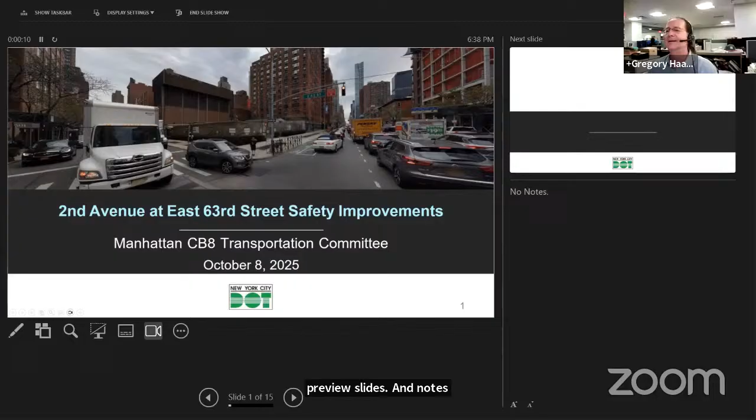Okay, can you see the slideshow? Yes, the whole thing. We do, but we see the preview slides and notes also. All right, I don't want to do that - hold on, actually there are no notes. There you go, there you go. Yep - actually no, that's not it, that's not it. Let me try something else here, hold on.

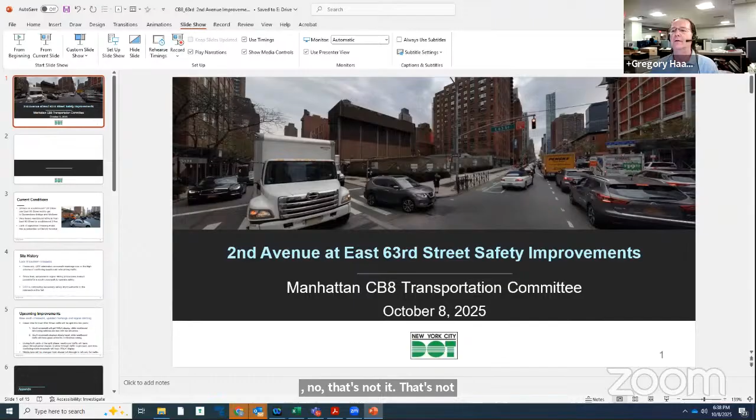Okay, what do you see now? Still don't see it. You see what? We're only seeing you, Greg. We don't see anything. Did we hit share screen?

Okay, now we see your screen. I think you need to open the file, we see your folder. Hold on, then this should work. Now what do you see? We see the right thing now.

Okay, good, we're good. So this is about Second Avenue and East 63rd Street. This photo here is looking south on Second Avenue. This is looking east on 63rd Street. And there's no crosswalk here, I'll explain why in a minute.

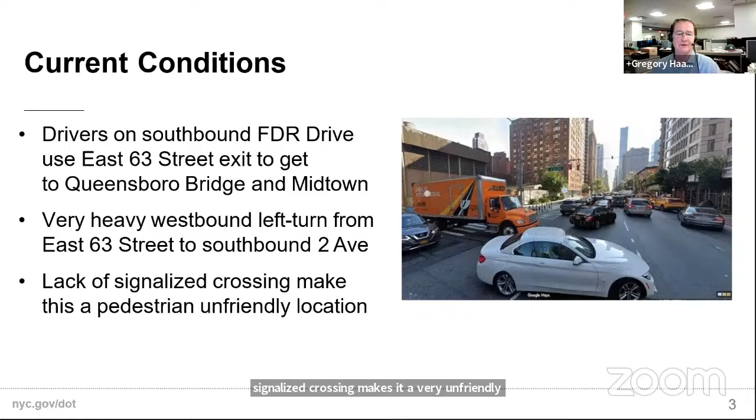There used to be a crosswalk there about 20 years ago, and it was eliminated because of this dangerous, conflicting, large amount of traffic that turns left into the crosswalk. So that's why we took it away 20 years ago. Since then, we have different signal timing tricks that can make it possible for a south crosswalk to operate safely.

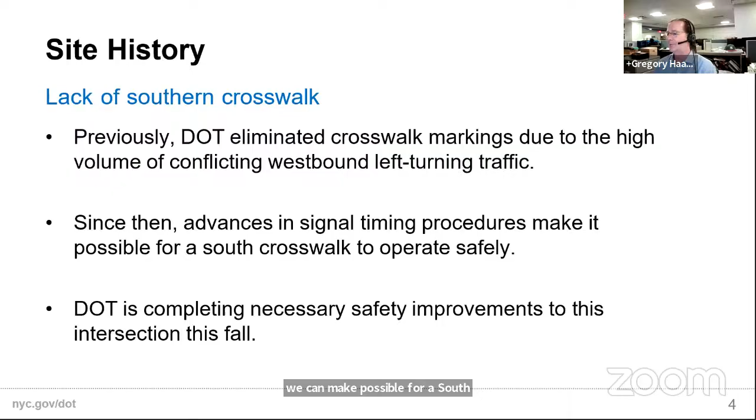So this is the idea: the green time for westbound East 63rd Street is split into two parts. During the first part, the south crosswalk will get the walk display with the stickman, and the westbound left-turning vehicles will be held with a red left arrow so that the pedestrians can walk without having to worry about cars turning into them.

Then, during the second part of this split phase, as we call it, the south crosswalk stickman will turn into a steady hand after the pedestrians are done crossing, and the red arrow will turn into a green arrow so the cars can turn without dodging pedestrians. During both parts of this split phase, there would be a green through arrow for 63rd Street because the through traffic doesn't run into anything, and the north crosswalk will have the walk display during both parts.

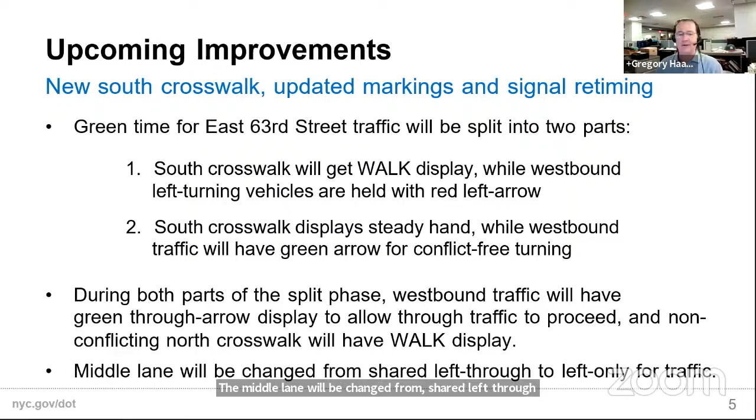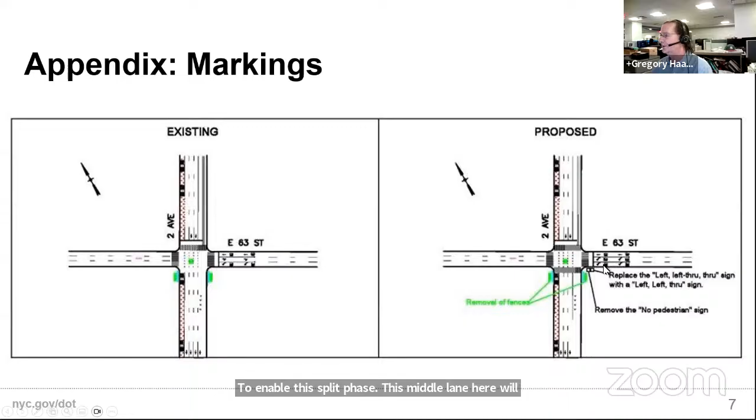The middle lane will be changed from shared left-through to left only. Let me show this - it's kind of small. Today on East 63rd Street approaching 2nd Avenue, the markings are faded, but the signs tell you the left lane is left turn only, the middle lane is for left and through traffic, and the right lane is for through traffic. To enable this split phase, this middle lane will also be left only, so there'll be 2 left-only lanes and 1 through-only lane.

Just to once again emphasize how the timing will work - this is the way it is today. When it's green for southbound 2nd Avenue, these green circles represent the crosswalks, so the west and east crosswalks go, the north crosswalk is don't-walk, and there is no south crosswalk, while 63rd Street traffic is held with a red. Then it just flips: green for 63rd Street, green walk for this crosswalk, and red for that traffic.

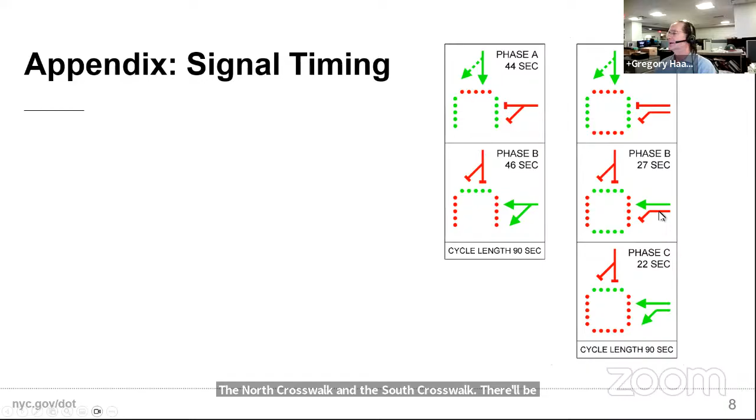Under the new plan, this phase will stay the same. Here are the 2 parts of the split phase I was just talking about. During the first part, it's green, it's walk for both the north crosswalk and the south crosswalk. There'll be a green through arrow for through traffic and a red left arrow so these pedestrians crossing don't have to dodge cars that are turning.

Then, 27 seconds later, this will turn into a don't-walk with the steady hand. The green through arrow will stay green, and this red turning arrow will turn into a green turning arrow, so that when they turn, this will be don't-walk.

That's the plan. Any questions?

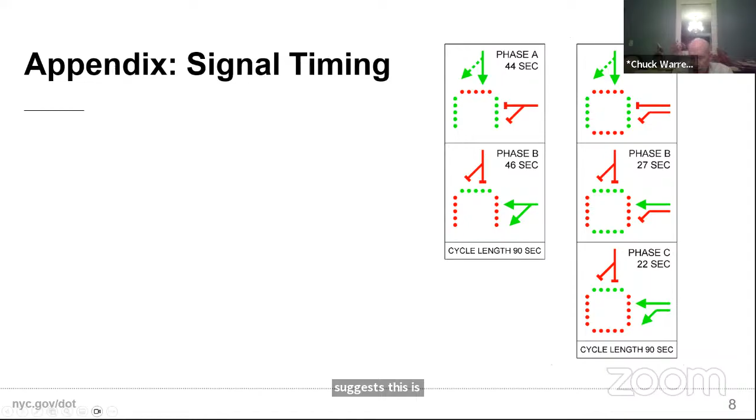Before we get to questions, one thing that comes to mind: I know at various other intersections with lights like this, a lot of times pedestrians just keep crossing. This suggests it's going to be a problem for traffic wanting to make the left turn coming off the bridge, and you're going to get a lot of backups.

That's true, we do see that, but there isn't a whole lot of pedestrians. There are going to be jaywalkers here, just like there always is. But if there's a traffic control agent, which often there is, especially during PM rush hour, as long as it's don't walk, his job will be pretty easy, holding the jaywalkers. It's very difficult for a cop to hold pedestrians when it says walk.

What's one lousy cop going to do? But if it says don't walk and there's a cop out there, remember the great majority will have already crossed, because during this phase, when it's green for 2nd Avenue, the pedestrians are piling up, and the ones who piled up will have already crossed. I can't tell you nobody's going to jaywalk during this phase, but at least the ones who were waiting will have already crossed. Anyone who arrives with no cop there, yes, there could be jaywalkers. But during the crunch times, when there usually is a traffic enforcement agent, at least he can hold them because the steady hand will be up.

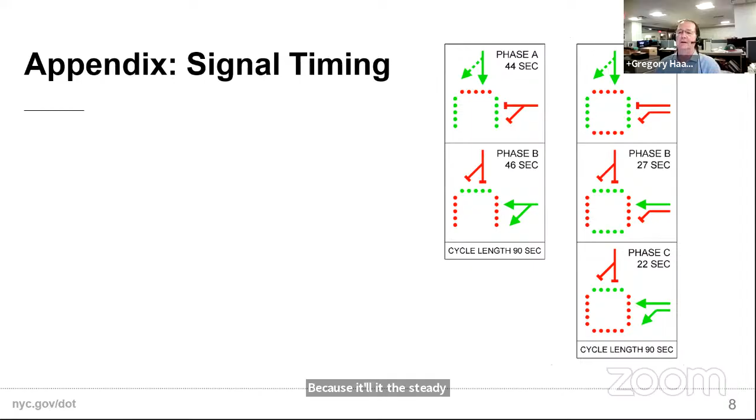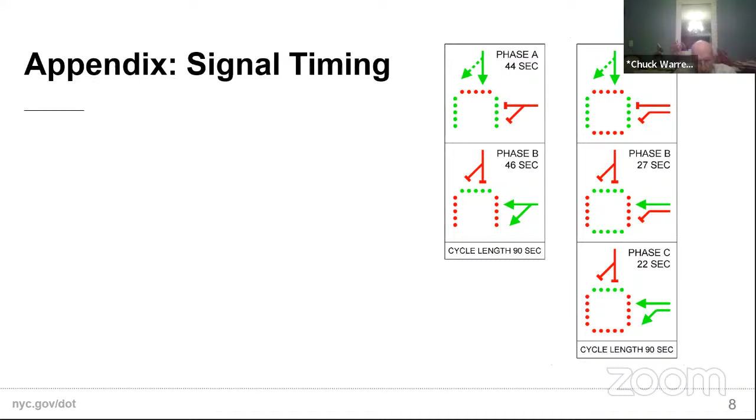So, are there any questions from the public on this new configuration here? Is there any hand raised at all, John? First, Dylan Yen. Hi, can everybody hear me?

Yes, cool. So, as somebody who uses this span almost daily, the upper level already experiences severe backups reaching deep into Queens, especially because it's the only toll-free route in Manhattan that doesn't hit the congestion zone. If I understand this correctly, DOT is proposing to cut turning time in more than half and reduce that large amount of traffic turning onto 2nd Avenue.

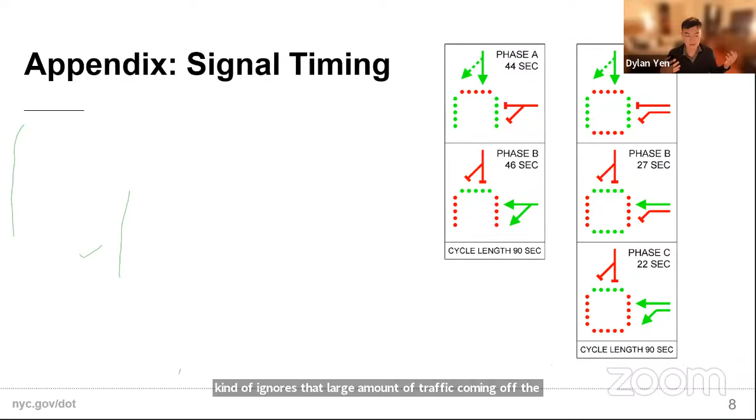It also leaves turning into like 2 lanes only, a left turn only, turning it into a single lane for through traffic to squeeze through at a standstill. And if somebody does a pickup or drop off anywhere on 63rd Street, nobody's moving for basically 67 seconds. The idea that this will create a conflict-free crossing while introducing a pedestrian conflict zone kind of ignores that large amount of traffic coming off the 59th Street Bridge. I just don't understand why this is happening.

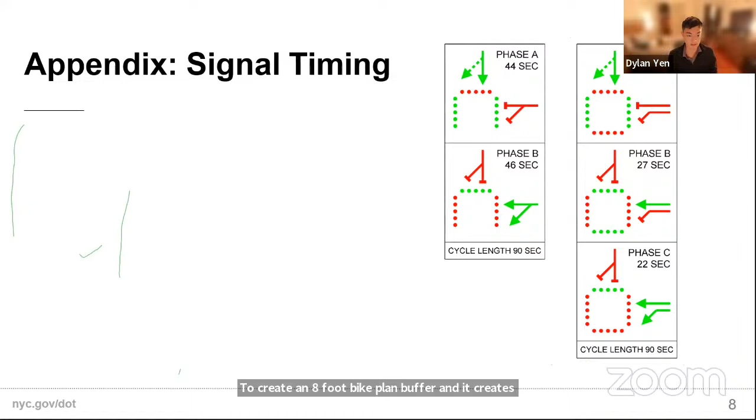I also want to remind everybody that DOT's redesign of 62nd Street has already reduced 2 moving lanes to 1 coming off that bridge to create an 8-foot bike lane buffer. It creates large backups all the way down to Queens, causing unnecessary gridlock and pollution on that upper level. This proposed change will just exacerbate that problem.

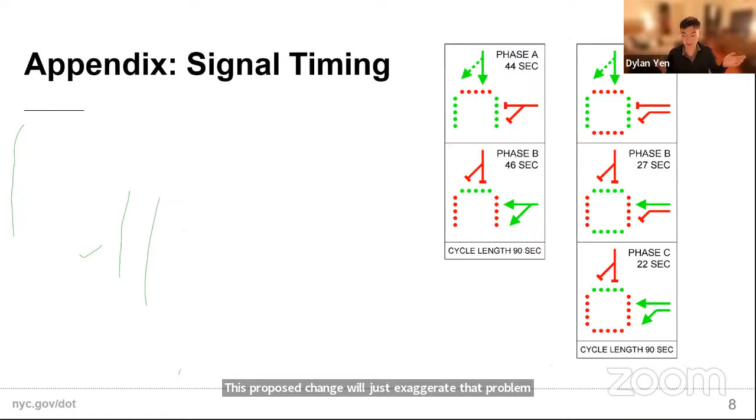And as DOT presented, they're not going to be able to stop the jaywalkers unless there's a cop standing there, so we're just creating unnecessary pedestrian conflicts. That south crosswalk was removed for safety reasons after a walkthrough with the DOT commissioner about 17 years ago, when protective railings were installed to reduce potential pedestrian conflicts and jaywalking. That worked. If it ain't broke, don't fix it, right?

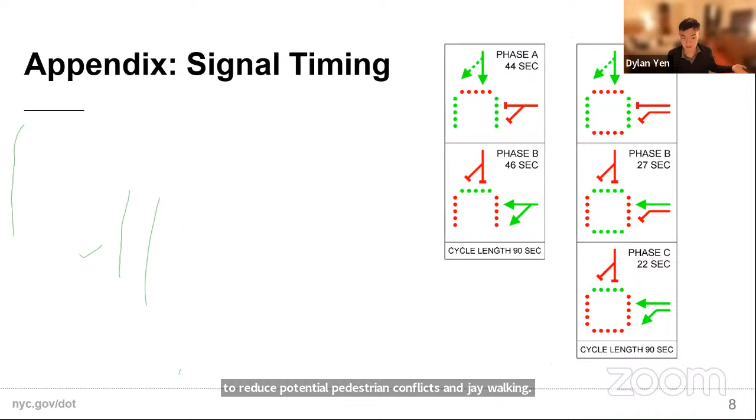We try not to hem in the pedestrians for the benefit of the cars. Okay, but let's, I think we've heard enough. There's another person who wants to speak on this, Marjorie Russell.

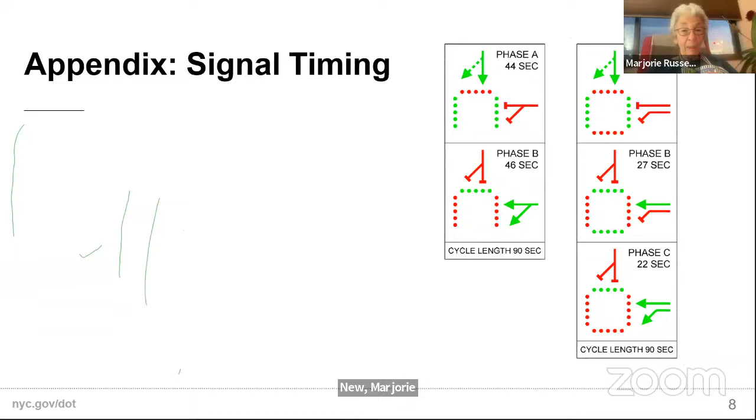Mute Marjorie. Okay, I want to agree with Dylan's comments. I live on 63rd and York. I try to avoid crossing 2nd Avenue anywhere downstream of the direction of traffic because they're all crazy, and it is so crowded. I want to give congestion pricing all the help it can get so that our neighborhood is bearable again. And I think 2 left turn lanes would be great.

And maybe more signs or something for these crazy pedestrians. I myself wouldn't cross there even if there was a walk sign, because cars ignore it. They turn right in front of you and right in back of you.

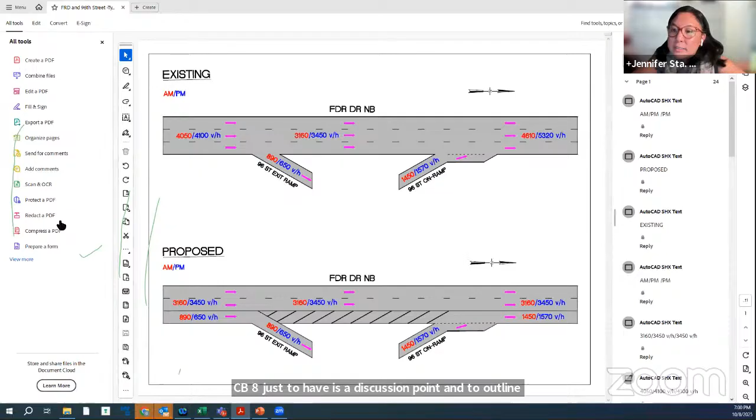Okay, so this is just a diagram, not to scale. So you're going north on the FDR Drive. There's an exit here for 96th Street, and then here's the entrance. The entrance does not have much of an acceleration lane at all. It's very dangerous for vehicles to try to weave in here. So the solution is to make this exit only so that it can come into its own lane.

It's exactly the same way it is at Houston Street. At Houston Street on the northbound FDR, the right lane is exit only so that the entrance from Houston Street comes into its own lane.

Okay, that seems like an improvement. Any comments from the public on this? Or the board? We hear anything?

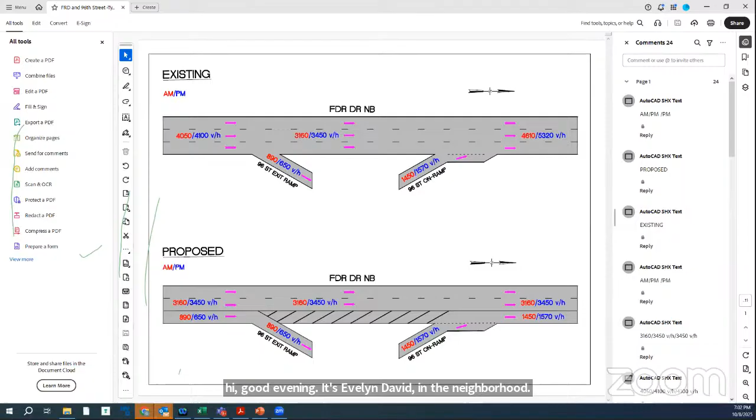It's Evelyn David in the neighborhood. I often drive along 96th eastbound, get on the FDR, no problems.

So what are you doing? You're making that an exit only from the FDR? I don't understand, I don't know what you're doing. Right now, if you're going north on the FDR, you can get off at 96th Street and go across 96 to the west side. Okay, so yeah, go ahead.

Can you see this aerial? I can't, I'm on the phone. No, just explain to me. Okay, have you gotten rid of the exit for getting northbound on the FDR? And if you've done that, where are you going to put the cars? How do we get on northbound 96?

We are not eliminating any exits or any entrances. The exit, when you're going north on the FDR drive, there's an exit for 96th Street. Correct, and there's 3 lanes on the FDR and there's an exit. We are going to make the rightmost lane exit only, so that after the exit there's only 2 lanes on the main line, so that the entrance to the FDR can come into its own lane and back to 3 lanes. Yeah, it's a tough entrance.

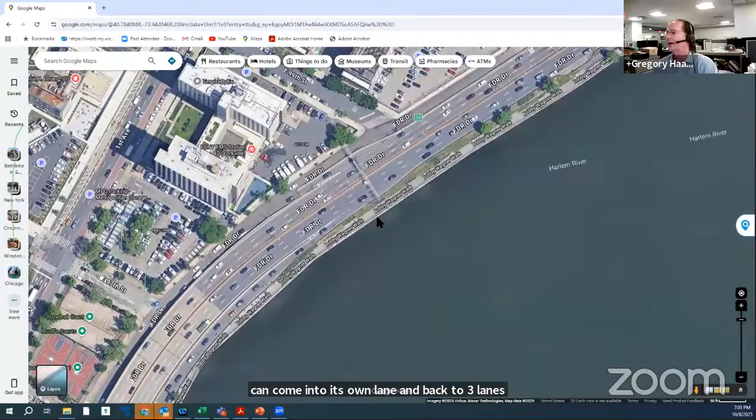For those of you that can see this aerial, look at that entrance. This does not comply, doesn't even come close to complying with federal regulations. There's not enough room to merge, plus there's a curve here. So when you get on the FDR from 96th Street, that's what's pretty scary. You put your foot to the floor and just pray that there's nothing.

No, actually, oh okay, all right, so there is a dotted line there. We all wait, we wait for the traffic to go ahead, and then we merge into the traffic going north. I'm speaking, yes, but getting when you're off the- yeah go ahead, go ahead. Sorry, when you mean you wait to get on the FDR from the entrance from 96th Street, is that what you're saying?

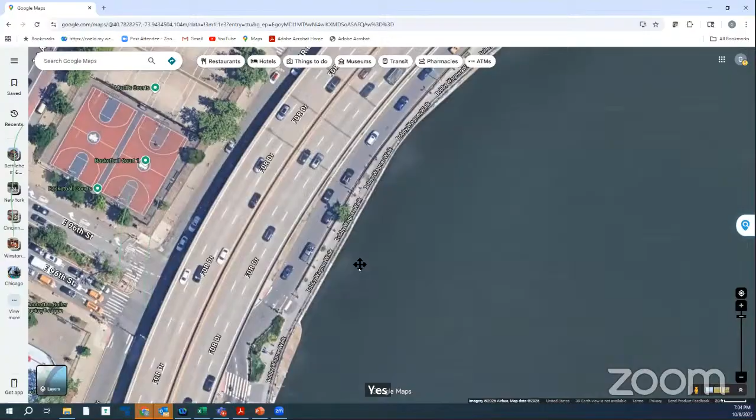Okay, no, okay, so if you're on 96th getting on the FDR drive going north, you go through a little drive-through, and then you get onto a part of the highway that's got dotted lines. You're not allowed to go over into the traffic until it's clear. So we wait, everybody waits. It's difficult to see if it's clear, there's not enough room. Oh, okay.

You have to come to almost a complete stop. Well, so that's it, it's hard. There's a lot of accidents here. It's very difficult to enter the main line from a dead stop, and plus the way the highway curves, it's hard to see even if that lane is clear.

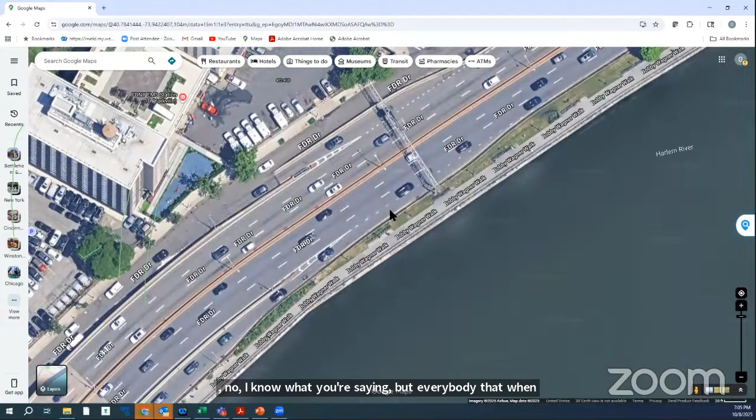Yeah, no, I know what you're saying, but everybody, whenever I'm driving, we're all really careful, we just pay attention, it's no big deal. But anyway, all right, so you are making that- it has a high crash rate, a very high crash rate. So what you're doing is making that into an actual lane.

Correct. And then you're making- okay, it will come into its own lane, without the need to merge. Oh I see, okay, all right, okay I got it, good idea. Okay, thank you, this is a big improvement.

I don't own a car, but I occasionally rent a car, and that entrance on 96th Street, I've done that because I'm going into Westchester, and it's exactly what you said. I've never had an accident, but it comes around, the cars are coming at you very quickly, and you can't see them well because they come around a curve. This is a big improvement.

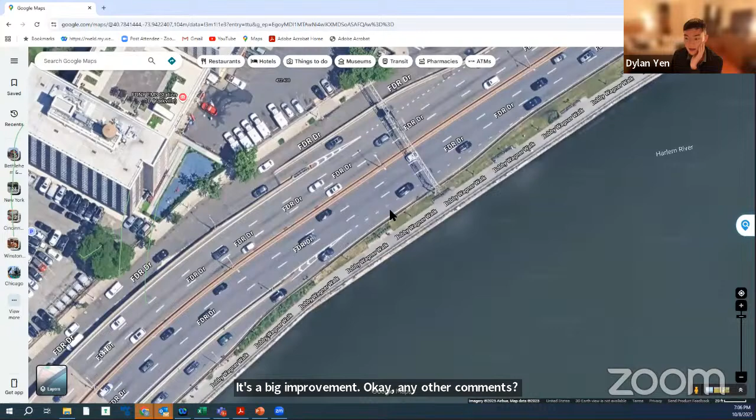Can you bring up that VPH graph that you have? That handy one, yeah, lovely, thank you. So just a couple of questions. When you're removing a lane, you're going to cut down on the VPH, the throughput on the main line, right? We're basically cutting off like we do at Houston Street and at, I think, 61st, right? Where it comes, where it goes into 2 lanes.

We're cutting the throughput rate, right? Basically through to the Triborough and the Willis. This is how I'm understanding it, correct? Yes, instead of in between the exit and the entrance, there will only be 2 lanes instead of 3. Okay, so we're cutting down a through lane.

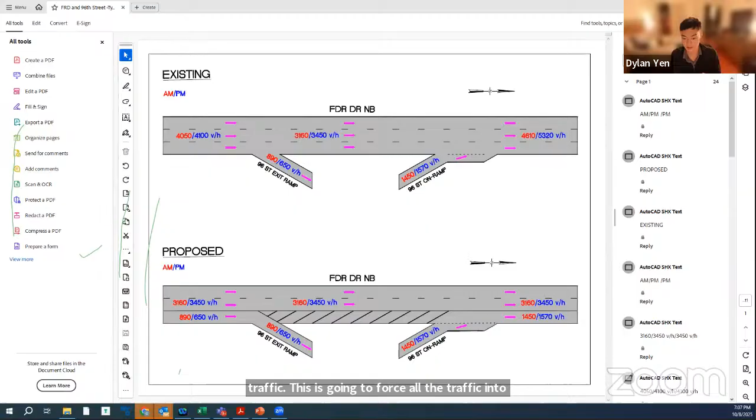Yes. I understand it's a high crash zone, but my worry is whenever I come up from the Brooklyn Bridge onto the FDR, there's always a backup, sometimes all the way down to the Manhattan Bridge, where the 3 lanes merge into 2. My worry is it's just going to force all the northbound through traffic to the bridges into 2 lanes. And I understand it's a really short on ramp. It's almost as bad as the Merritt, not quite, but almost as bad as the Merritt up north.

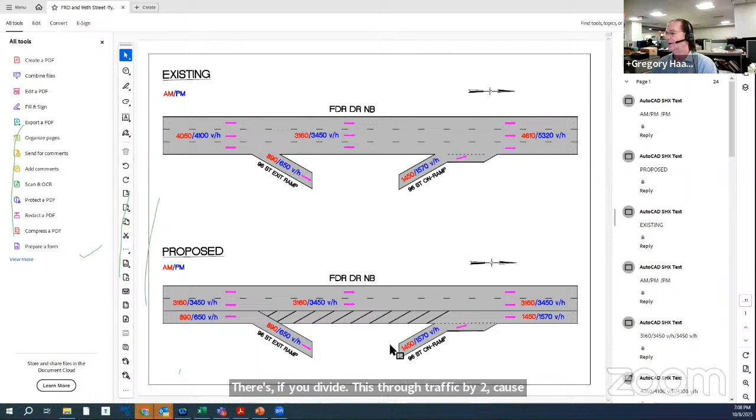But is there a way? Well, first of all, does the traffic support removing a lane from the main line? Yes, it does. If you look at these volumes here, this is the max there is. This would be roughly 1,700 a lane. But look at this, if you divide this through traffic by 2, because there's 2 lanes, that's about what comes on.

And just to show you something else, this is the 96th Street exit. Look at all the cars getting on the 96th Street, and look at how clear this is. There are times when this does back up, but 2 lanes should suffice for the amount of traffic after this exit. During crunch times like this, anyone who's going through would never get in the right lane because it's backed up due to the exit.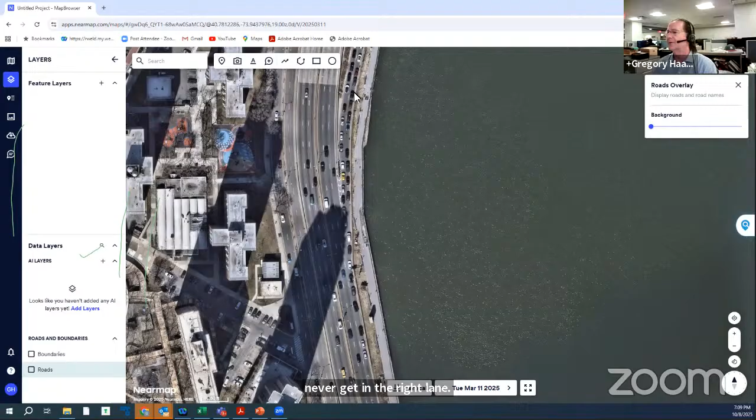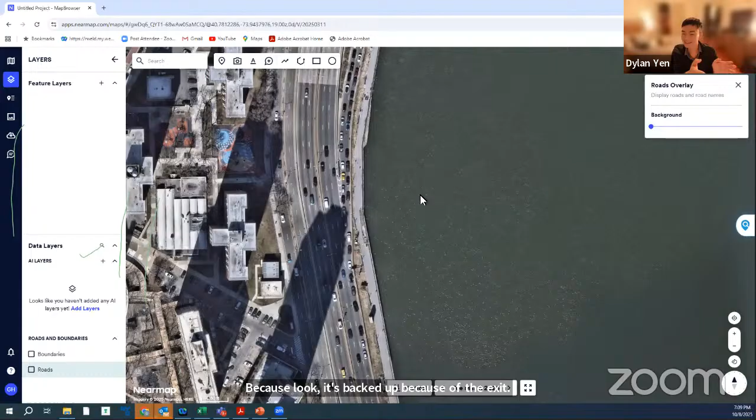And how do we make sure that people don't fly down the right like they do at Houston Street? If you're going to close the lane just with paint, I guess is my question. We can't keep people from flying down, but at least they'll be flying down into their own lane and not merging into another lane. We can't keep people from speeding or driving recklessly, but at least they'll be coming into their own lane and not forcing themselves into somebody else's lane.

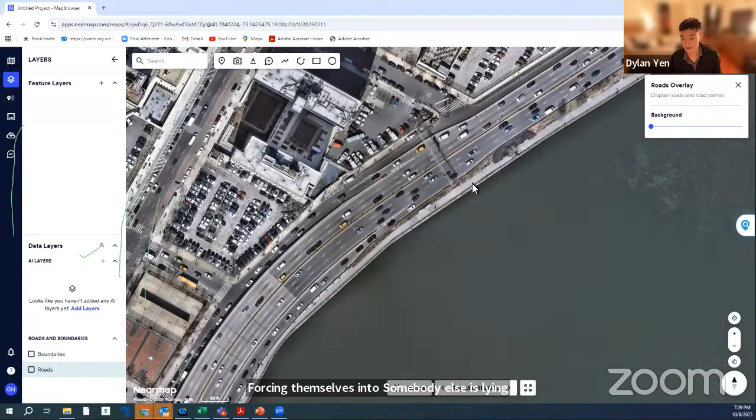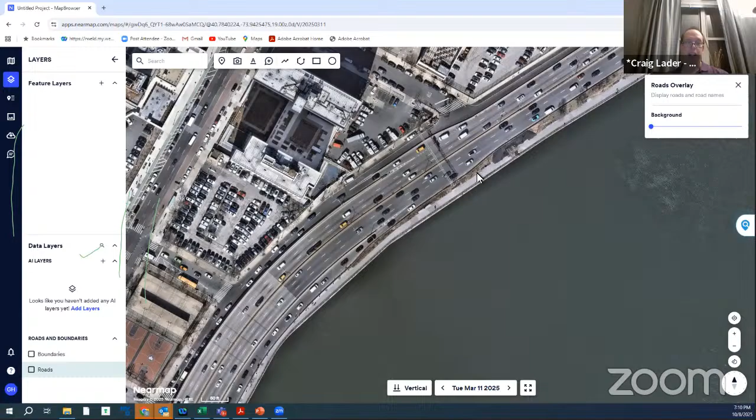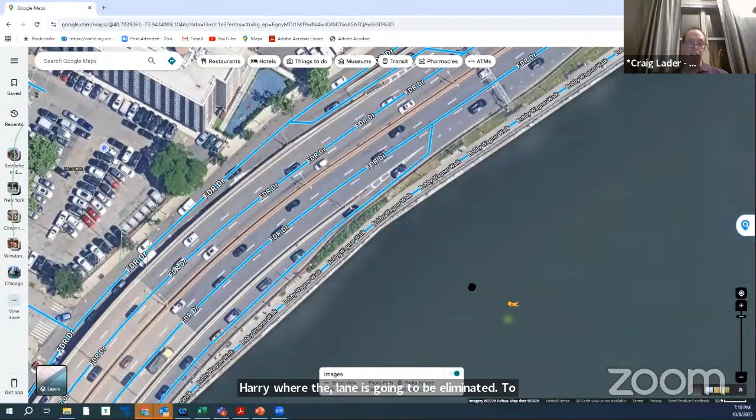Yeah, okay, all right. Before we go to Andrew, I just want to follow up on that because when we learned about this proposal and I had previewed it, I sent in a comment saying we should include a Jersey barrier somewhere along the way in that area where the lane is going to be eliminated, to essentially ensure that anyone who tries to drive on the new shoulder will not be able to do so the entire way, and will have to make sure they are in what is now the middle lane, to ensure the inbound entering vehicles have a clear, uninterrupted, safe entrance.

So is there any reason - you're talking about this here, this will be striped out. You're saying maybe we should put something hard here to prevent the cheaters from using this lane. Yes, because we'll look into whether that would make it safer for the inbound traffic, incoming traffic, I would assume. We'll look into putting delineators or some sort of vertical element. Any type of delineator would be great. So if you could look into that, that would be really appreciated.

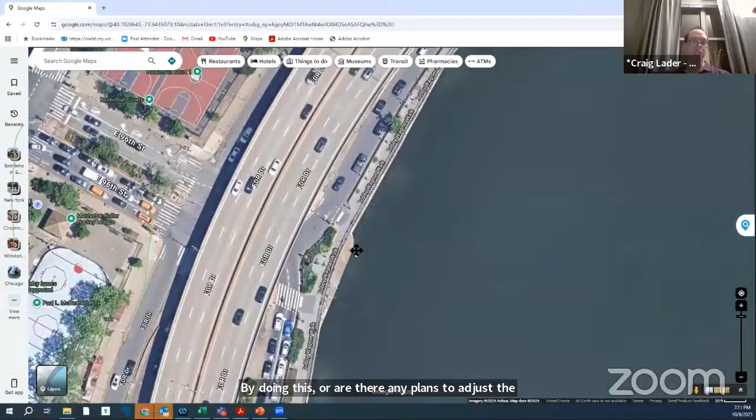Just one more question, actually. Especially since congestion pricing began, there's been a lot more congestion at the entrance filtering back onto First Avenue, with vehicles trying to make the right turn from First Avenue to enter the FDR Drive via 96th Street. Oftentimes traffic backs up coming up the York Avenue entrance, largely because you have 2 lanes coming in that have to merge into 1 lane on the existing ramp. By doing this, are there any plans to adjust the configuration so you're hopefully allowing for improved conditions as a result?

Because it's certainly going to improve the flow entering, but you're still going to have the secondary issue of 2 lanes from both directions filtering into 1 along the ramp, which I guess you can't avoid. But can you do anything to improve that condition, straighten it out a little, and make that merge a little clearer, whether with striping or something else? Great question, Craig.

For this right now, no, but we have on the books, I'm sure you guys know about the York Avenue study, and I'm hoping, because York Avenue is just a nightmare northbound, when we do the York Avenue study we will look at improvements like around here to see what can be done. So to answer your question, for this project, no, we haven't done anything here, but we will look at it when we commence the York Avenue project. We realize there could be a lot of things we could do right in here.

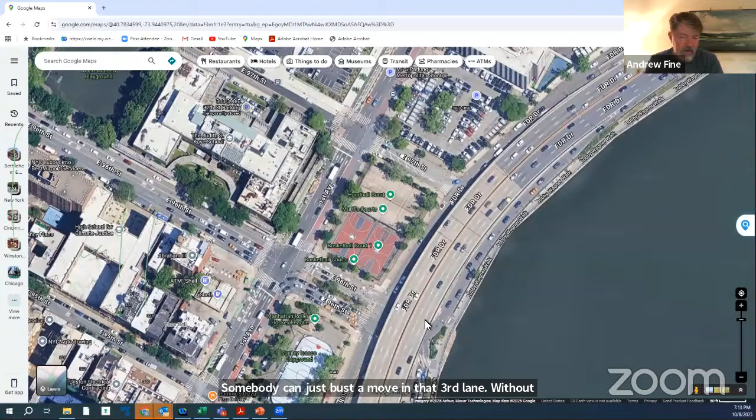Can't see anything, but if you can hear me, Craig makes a great point in terms of the lane that could be cheated on, that third lane that you're proposing blocking off, because you would not really accomplish anything if somebody can just bust a move in that third lane without any Jersey barrier or anything else. You're just going to end up with the same accident rate, maybe even worse, because you're providing a prohibited space that people can just cheat and blast through.

That's one point. Second point, to Evelyn's point, I've merged on from 96th Street probably a few thousand times in my entire life. It's not an issue. If you don't have the ability to merge on, you don't merge on, you wait. That's just the way it works. That's called driving. So if you don't know how to drive, you probably shouldn't drive. And I don't really see this as solving a problem that I don't think really exists.

Third, what you guys should really be looking at is the light timing on First Avenue and 96th Street, because as somebody who has given up on trying to make the right turn on 96 from First Avenue when it is legal, it's impossible. The lights are timed such that all the traffic from 96th Street creates gridlock, so when you finally get the light on the First Avenue side, you're lucky if 4 or 5 cars manage to squeak in, either through the right turn lane, the second lane, or even the third lane of traffic on First Avenue. The light timing there is an absolute disaster, and you definitely need enforcement there.

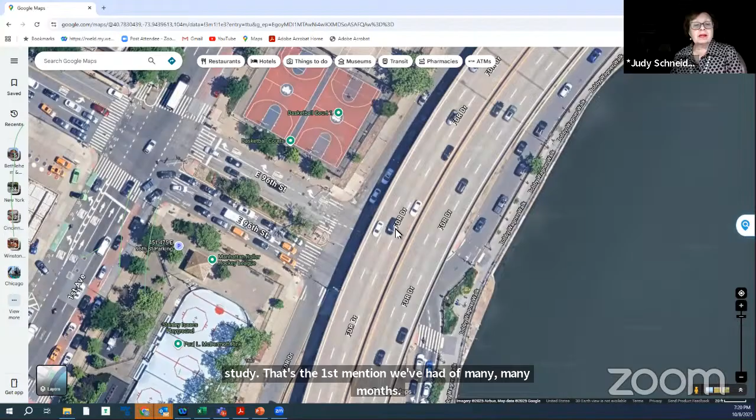Greg mentioned the York Avenue traffic study. That's the first mention we've had in many, many months. Can anybody tell us - I was on that committee - when that's going to resume? Is it in '26, '27? When are we going to start working on that again?

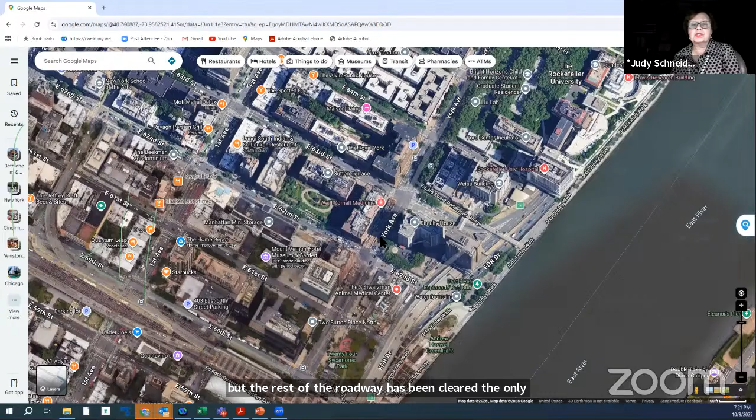It was requested to wait until the road work, the DEP work, is done, and that work should be finished by November. They have two water mains, two drains on 62nd Street that they have to put in, but the rest of the roadway has been cleared. The only blockage is that between 66th and 67th, MSK is building a new hospital. Other than that one block, we can go around it, and hopefully start to plan the York Avenue traffic study sometime after the first of the new year.

Greg, thank you. We're also enthusiastic to officially kick off, or re-kick off, this study, because it certainly is ripe for improvement. So we will keep the board posted when we're able to fully move forward here.

I spoke with the people doing the York Avenue work, and they tell me by the end of this year they should be done. They've done most of the sidewalks, they've done the street. The only thing left is the hospital, and I don't think the hospital should hold us up from 66th to 67th. That's what we're hearing as well in terms of timeline, so we'll certainly keep the board posted. It would be nice to have a 20th anniversary start of this.

We heard the same thing, that they should be done by November, so we're excited to get started. But when pressed, they wouldn't guarantee they'd be done by November.

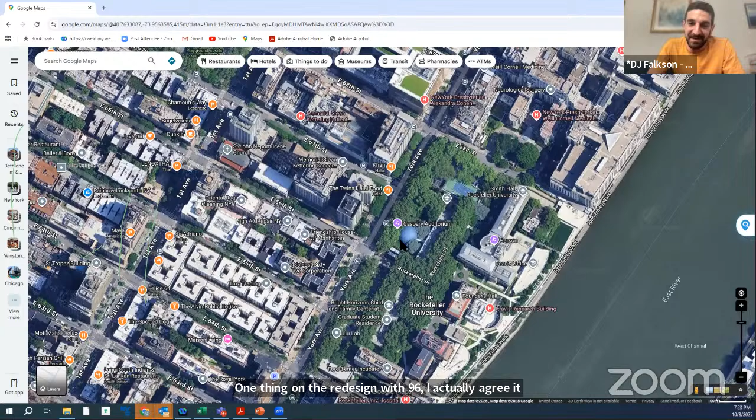So it's great that some people are good drivers and would never crash there, but I think the job of DOT is to deal with drivers as they are, not as we wish them to be. One thing on the redesign with 96th, I actually agree it seems bad for drivers there. I won't opine on how to do that best, but I'll mention it's a heavy pedestrian crossing with the underpass there, because if you're walking up or down the Riverwalk, one way to cross back over to First Avenue is there. It's already not a great experience for pedestrians, so please don't deprecate it further with any street redesign efforts.

A more general comment and question, Greg. I think the tenor of comments we've heard so far on the first two items can basically be summed up as driver's needs versus pedestrian and safety needs. How does DOT balance the needs of drivers versus pedestrians and safety when making these decisions? I don't think you need to give a dissertation right now, but maybe publicizing that information more might make some of these meetings easier.

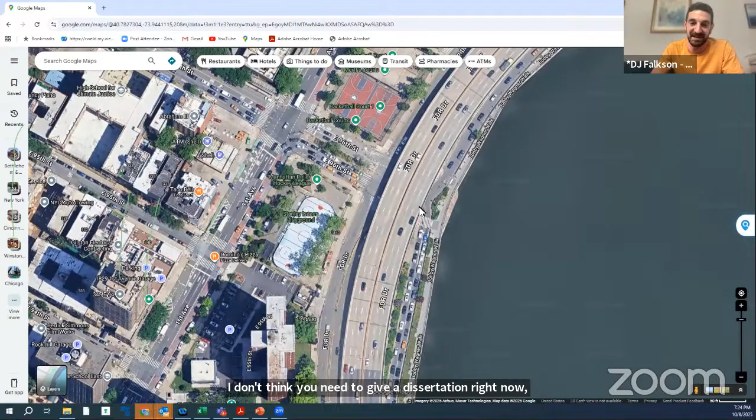Okay, thanks, DJ. I think we have one more person. I don't know if they wanted to comment on this item, Marjorie.

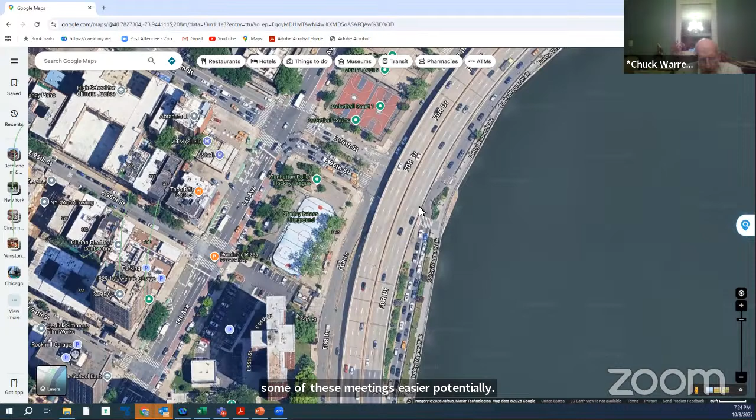Well, yeah, I just wanted to say about York Avenue and 62nd, 63rd - they're not actually done, because over the weekend they were digging up one of the middle lanes between 62nd and 63rd. They told me they'd be done by November, but there are no guarantees. They're always finding unexpected problems underneath there. But eventually they're getting there. That's all I wanted to say.

And DJ Falkson, very good remark - pedestrian versus driver, that is really a key thought. Thank you. Okay, let's go on to the next item.

This is a DOT item regarding the Lexington Avenue bus lane modifications on Lexington Avenue from East 60th to East 52nd Street.

No, so Chuck, I'll be introducing - and thank you, Greg, for your time and efforts tonight. I'll be introducing Nolan Levenson for our transit development unit and our TPM division. DOT is proposing to convert existing curbside bus lanes on Lexington Avenue from 60th Street down to 52nd Street. We've presented to community boards 5 and 6, and so we're here tonight to present to you all. This is a proposal where we're looking for board support, and as with the last two agenda items, we're happy to respond to any questions and address any issues after the presentation.

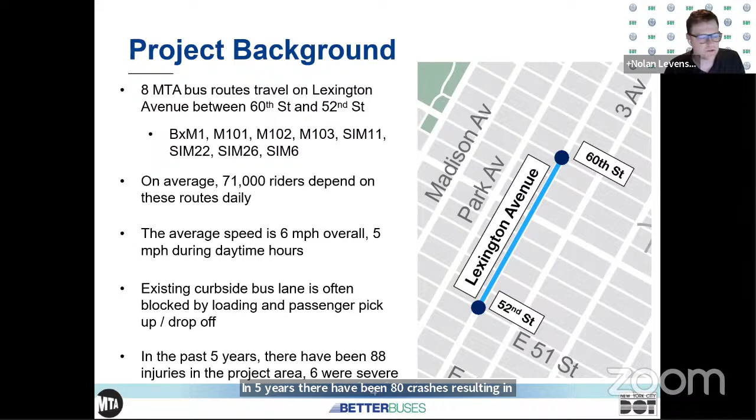It's also a location where we've seen a lot of injuries. In 5 years, there have been 88 crashes resulting in injuries, of which 6 were severe. Since this segment is in the congestion pricing zone, we've looked at the data, and traffic on Lexington has been reduced somewhere around 20% in the AM and PM peak hours. So we expect that this proposal can be accommodated within the existing traffic volumes on Lexington.

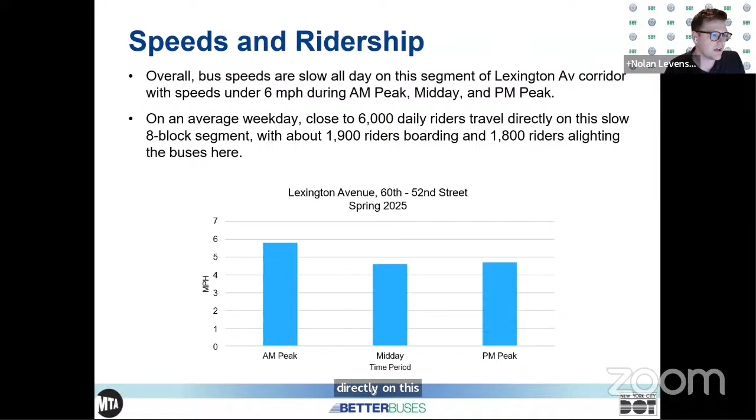Overall, bus speeds are slow all day on this segment of Lexington, with speeds under 6 miles an hour during the AM, midday, and PM peak. On an average weekday, close to 6,000 daily riders are directly on this corridor. Before we presented a number of all the routes combined, this is the actual amount of people on buses in this segment.

So the goal of the project is to improve bus service by upgrading the existing curbside bus lane to an offset bus lane that would be in effect 24 hours, 7 days a week. This would bring the benefits of the existing offset bus lane segment that we installed a few years ago between 96th Street and 60th Street.

We have seen great success on that segment, which we've presented to the board as a follow-up, where bus speeds have increased in that section of Lexington up to 26%, as well as a great reduction in pedestrian injuries by 35%.

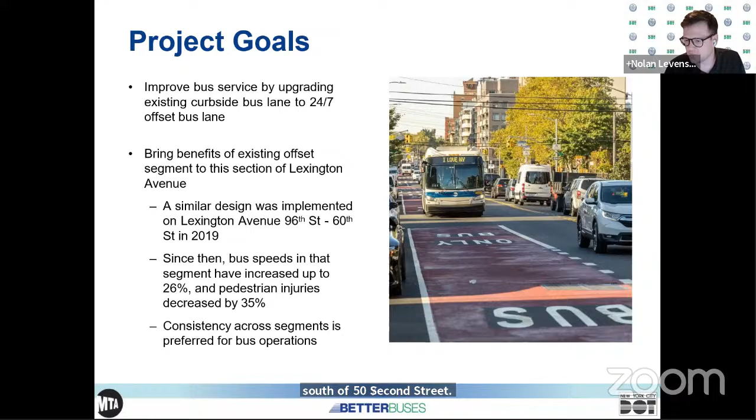The other thing is that we are looking for consistency of the bus lane treatment throughout the corridor. It is in the offset position between 96th Street and 60th Street currently, and also in the offset position next to the painted pedestrian sidewalk extension south of 52nd Street. So this segment wasn't touched before, but it continues to be an issue for bus service.

So the proposal includes, as I mentioned, moving the existing curbside bus lane into the lane next to the parking lane. We call that an offset bus lane. This improves bus speed and reliability. It allows buses to travel through the corridor without being blocked by vehicles using that curb lane.

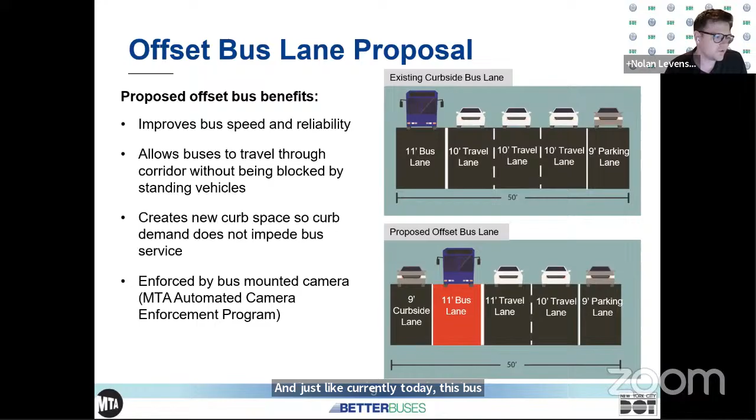It also opens up the curb, creating some of the activity that supports the uses on the west side of the street. And just like currently today, this bus lane will continue to be enforced by cameras on the MTA buses themselves.

This is what a typical block would look like in plan view. On the left, you can see the current configuration with 3 general travel lanes, a lane for parking on the east side of the street, as well as the bus lane on the west side of the street.

In the proposed configuration, there would be on the west side of the street the curbside parking and loading lane that I mentioned, two general travel lanes, the dedicated offset bus lane, as well as the other parking lane on the east side of the street.

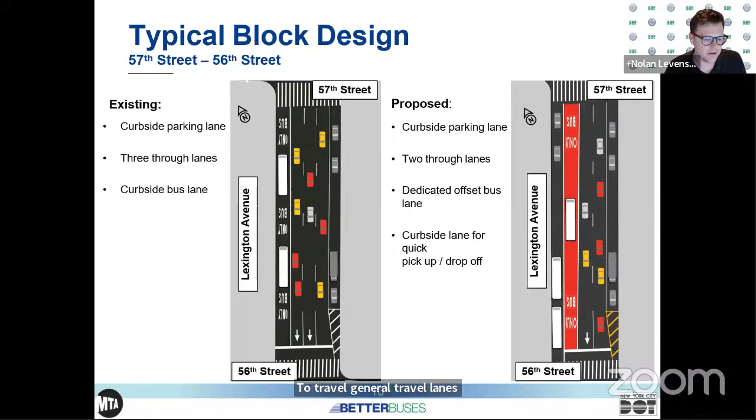So in summary, we are proposing to adjust the location of the bus lane from curbside to offset, which both improves bus service and curb access, as well as safety.

As Jennifer mentioned, we have presented to the other community boards as well as elected officials and other stakeholders, and we are generally looking to make this change either this fall or first thing in the spring next year. After the project is implemented, similar to the other section between 96th and 60th Street, we would be monitoring its performance as well as traffic.

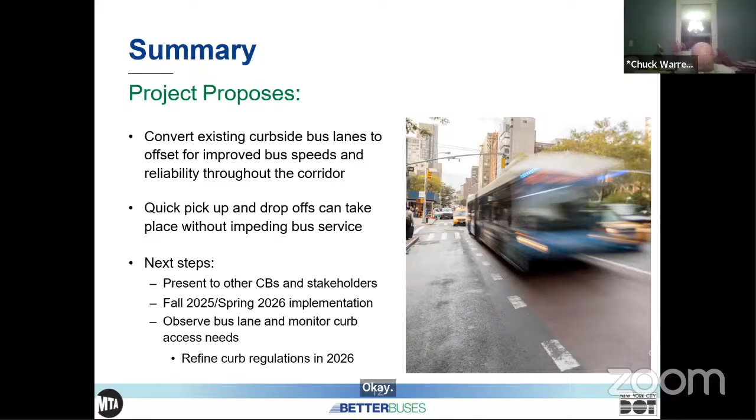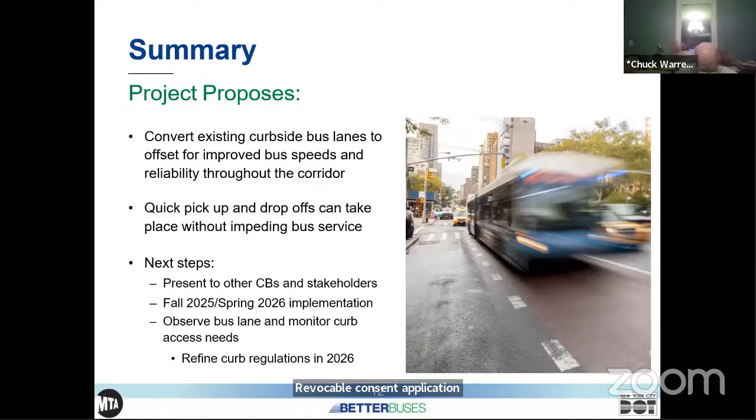Thank you, Raphael. Okay. Item number 4 is a revocable consent application to construct, maintain, and use a fenced-in area at 132 East 70th Street between Park and Lexington Avenues. Is there someone here to present that item on behalf of the applicant? Looks like Gary Eisner just raised his hand. Okay, or something like that. Okay. All right.

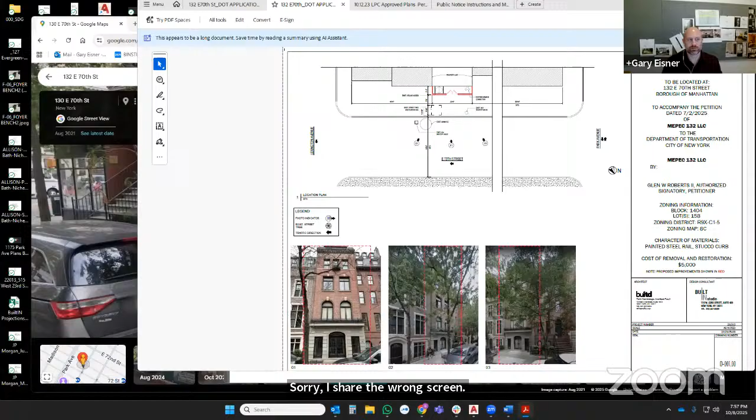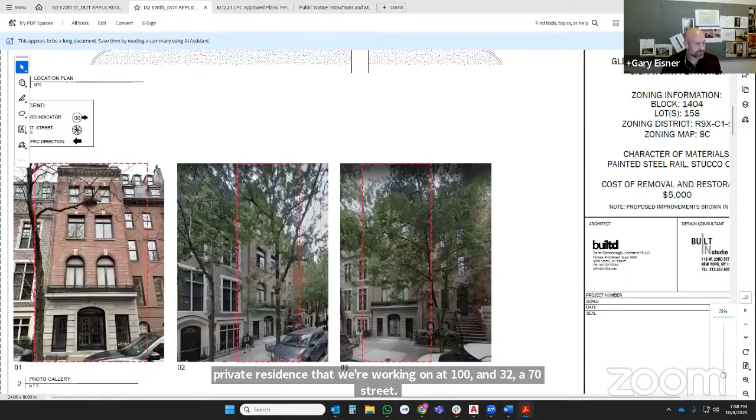Okay, so we're proposing installing a fence in front of this private residence that we're working on at 132 East 70th Street. I'll zoom in to our presentation so you can get a sense of the location of said fence.

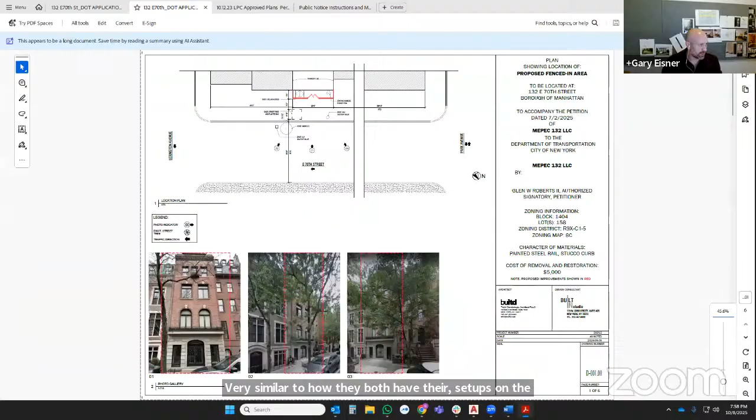Basically our entrance is right here. We're proposing this fence goes in line with both of our neighbors, very similar to how they both have their setups on the sidewalk. To go through this, the close-up here, the concept is the same for the neighbors. We're just proposing a little concrete curb, a metal rail with a gate, to offer some privacy, some buffer from the house to the sidewalk.

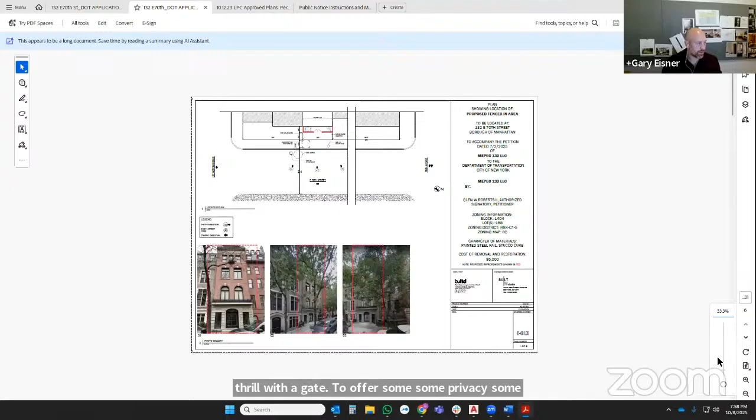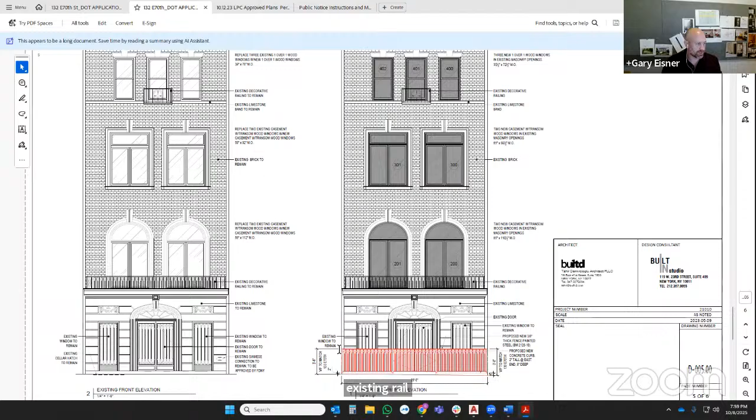We're matching the design of the railing with some of the existing details of the house. So you can see the front elevation here. There's this existing rail here, so we're mimicking that design aesthetic and bringing it to the front gate. That's the close-up of the detail of the railing.

What's in front? How far out does that go then? I can't make out the numbers. It goes out from about your building line, about 4 feet forward to the face of the curb. You can see the intent is to align with the neighbors, so it doesn't stick out any further than our neighbors, both east and west.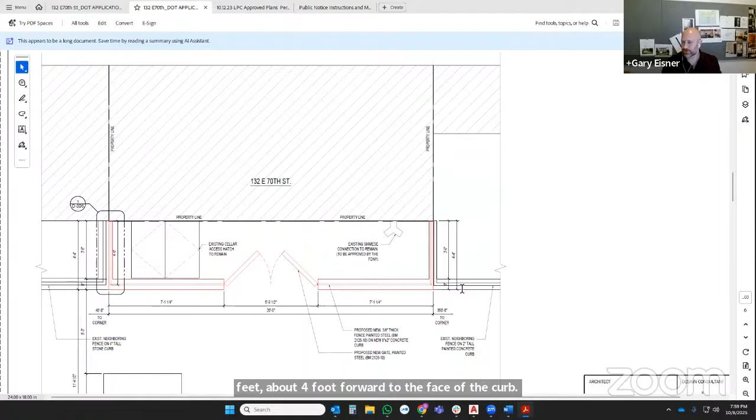And there's no trees that are there? I guess I don't see anything. There's a tree pit here. It doesn't show on the plan, but there's a few tree pits along this whole street.

What will the clearance be to the curb? Clearance to the curb will be, I have to do some math here. It's 11 foot 4.5 inches to the curb, this dimension here. Okay, mm-hmm, okay.

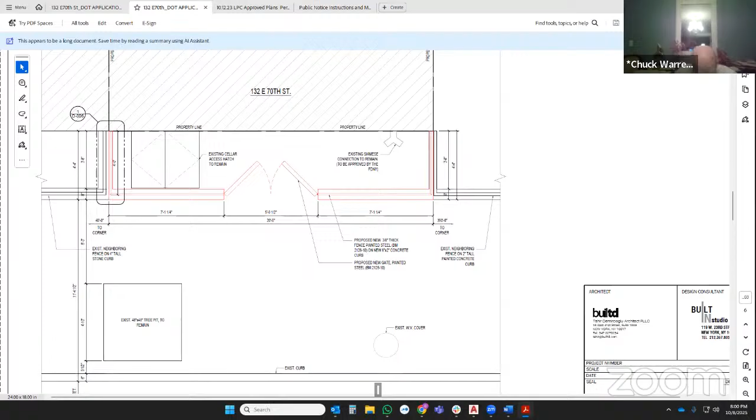Are there any members of the public who want to comment on this application? Let's see if there's anybody here. Dylan Yen has his hand up. We have a couple, well, okay, yeah.

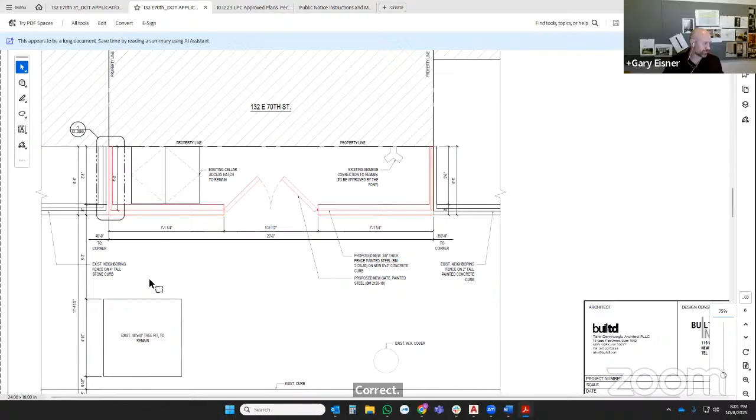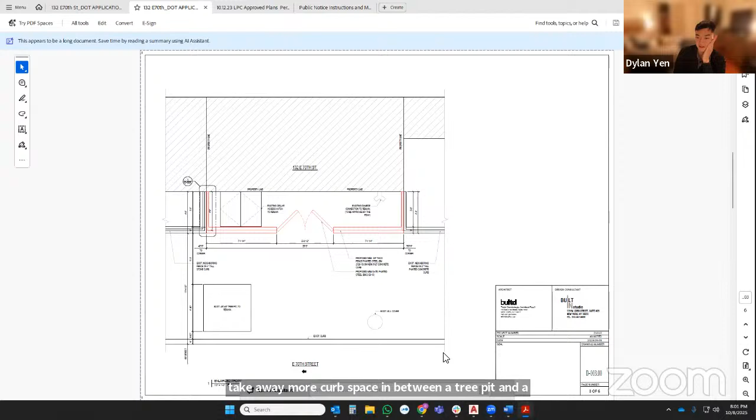Hi, I'm curious, so you said there's a tree pit there, where you're proposing to build the fence. In between there's going to be a tree pit and fence, correct? So I want to know what's remaining left on the sidewalk for pedestrians to go through. It's 5 feet 3 inches between our proposed fence and the tree pit. Okay, I'm just a little bit concerned if we're going to take away more curb space in between a tree pit and a curb. I'm a little worried that we're trying to funnel a bunch of pedestrians through a very narrow space, but that's my concern, thank you.

Yeah, the condition exists on the neighbor as well, there's a tree pit in front of their house where they have the fence. Okay, thank you. Anyone else from the public?

Okay, I think we have some board members. Alita? Thank you. So do you know when the fences of your adjacent neighbors were built? Because tree pits have gotten a lot larger, 5 foot 3 is not nearly enough room. It's not allowed, I believe, for dining on the sidewalk to have that amount of space between the tables and the curb. Second of all, what's behind that door? Because it looks like your house already juts out quite a bit. What's behind that door? It looks like a reception room rather than entry into an actual living space.

Behind our door? Yes, from this house? Yes. This was a commercial property, so there was a reception, but now it's being converted to a single family. Right, and what's behind that door, does it go right into a living room, or is it like a mudroom, is it an entryway, a vestibule? Okay, so you already have privacy when you have a vestibule behind those beautiful doors. So I don't understand the need except to create a moat against the multitudes of people, the riffraff, if you will, that populate the city and walk down the streets.

For me, asking for this fence, as you can tell, and I'm sorry if I offend anybody, is highly offensive to me because this is public space and we have very limited public space. The Upper East Side has the least amount of green space in the city. It is the most densely populated neighborhood, I understand, in the entire country. And so to take approximately 25% of the outstanding sidewalk, and that's to the curb, not to the tree pit, and use it for a single family forever, despite it being called revocable consent, just seems to me vastly inappropriate.